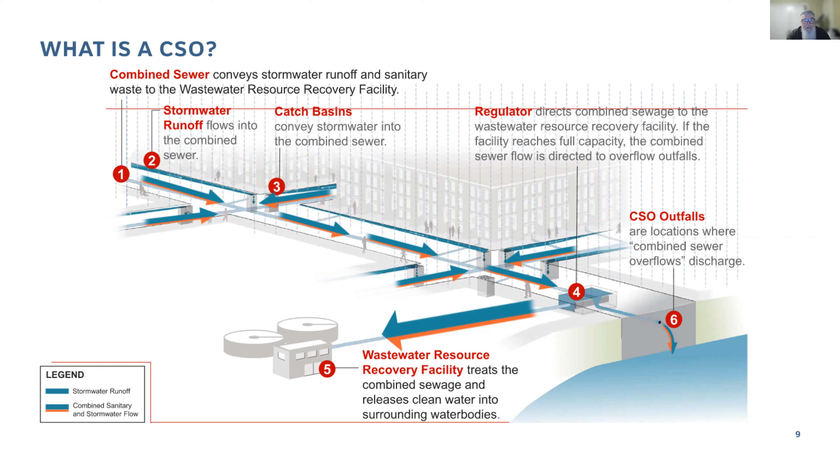So what is a CSO? New York City's sewer system is approximately 60% combined, which means it's used to convey both sanitary flow—from your toilet or shower, for example—and also storm flows from the street when there's rain or snow melt. When the sewer system is at full capacity, a diluted mixture of rainwater and sewage can be discharged into the local waterway. In this case, that's Gowanus Canal, and that is what is called a combined sewer overflow. CSO retention facilities, like the one we intend to construct here at the Owl's Head CSO tank site, collect and store that combined sewer overflow during a wet weather event until it can be pumped back to the wastewater treatment plant.

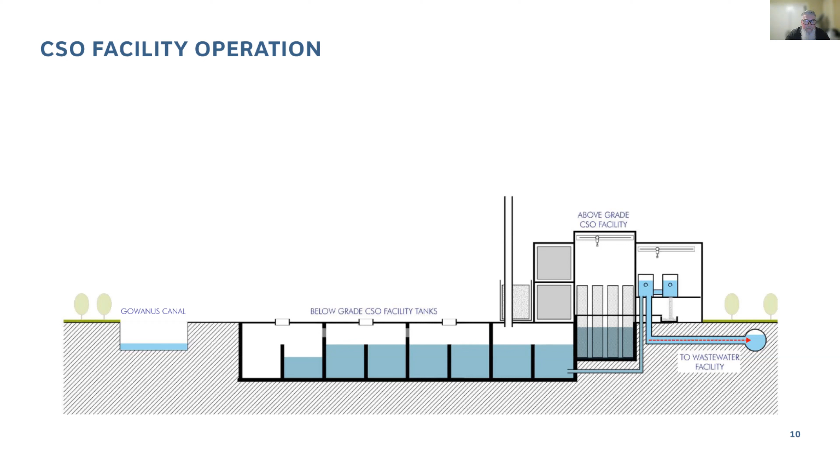The major components of a CSO facility can be seen here in this profile view. Most of the tank is below ground, so there are large holding cells below ground. Then there's an above-ground head house, which contains all the electro-mechanical equipment like screens and pumps, and control equipment. We will also have odor control and screens. Next slide, please.

Next slide, please. Just want to quickly review what's there today. Those of you who are familiar know it's been home to the Department of Sanitation's salt lot for a couple of years now. In addition, Big Reuse operates a composting operation for DSNY there. And the Gowanus Canal Conservancy was previously on site doing some ecological stewardship and programming. Then just south of 5th Street, there are a number of manufacturing and industrial businesses there.

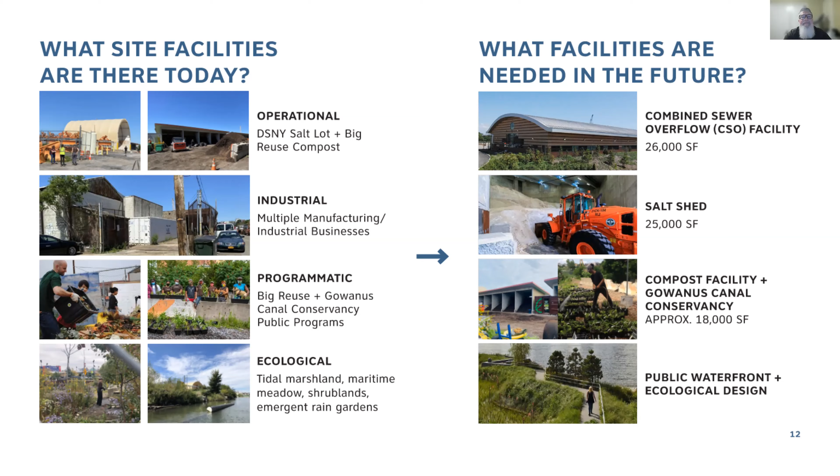Just quickly to talk a little bit about the project design phasing. We submitted the salt lot facility design to EPA back in May 2022, and the final design was approved by PDC back in August. We are completing the design for the CSO facility. There are actually 2 phases to that, CP2 and CP3, but they need to be submitted to EPA for review in August of next year. Then the last piece is design of the public realm and the Big Reuse facility, and that design will follow the CSO facility review by EPA.

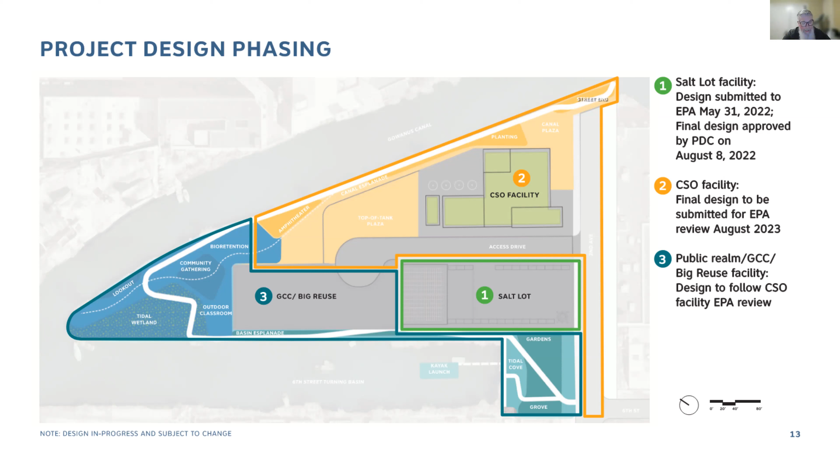This is the third in a series of public engagement meetings, and the feedback has been critical as the design takes shape. The next scheduled engagement meeting will be in early 2023 to share the design developments and continue this conversation. We plan to begin construction on the first construction package, CP1, in roughly spring of 2023.

As that's moving along, we will have a dedicated community liaison on hand to be the direct contact for the community. I also wanted to mention, you may have noticed there is some ongoing construction out there right now.

That construction is for a new bulkhead along the north side of that site. The bulkhead construction will be wrapping up around March or April of next year, right in time for the first phase of the CSO tank construction to begin.

And then construction is scheduled to be complete before 2030. So with that, I'm going to hand it over to Kevin Keating from Selldorf Architects to walk through the architectural design for the facility.

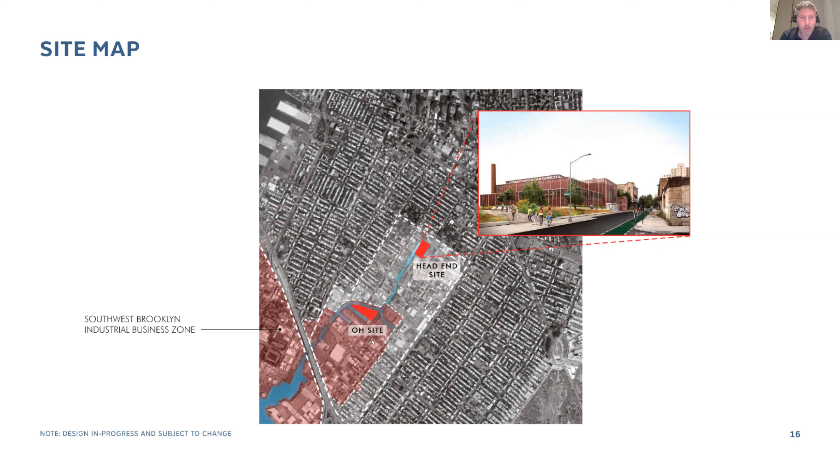Our site is located down where my cursor is, at the bend of the canal. We are in the Southwest Brooklyn Industrial Business Zone. Let's slightly reorient the plan here and zoom in a bit. As I mentioned, we're at the bend of the canal. It's a peninsula, surrounded by 1,700 linear feet of waterfront. It's a 5-acre site. A couple of key things to note here.

Again, we're in the Southwest Brooklyn Industrial Business Zone. This zone was created to incorporate zoning and manufacturing and keep them within the confines of the city, and to further help propel their growth. We're at the northern end of this IBZ zone. As many of you may be familiar with, this zone can be viewed from the F train viaduct, which crosses south of our site as you come out of the Carroll Street station and make your way back into 7th Avenue.

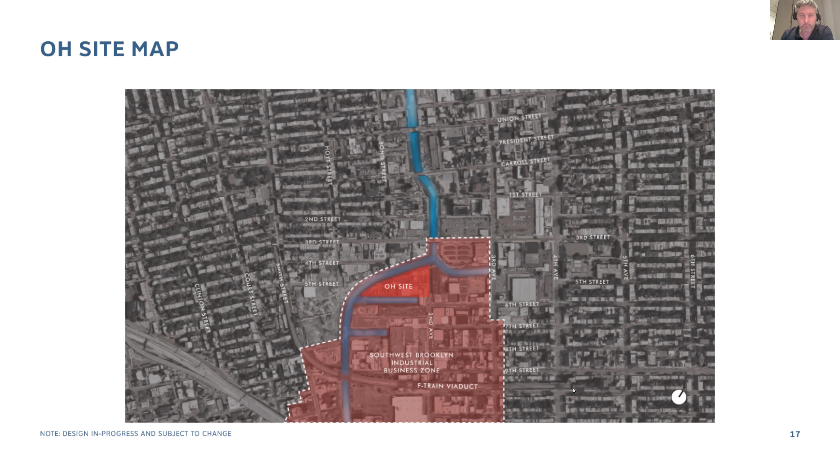This next slide here is actually from the Smith and 9th Street station. It's the highest elevated station in all of New York City, with a great vantage view of the site from this particular location. You could see here we've highlighted our site, the OH site, and the overall makeup of the IBZ zone. There's a pretty monochromatic palette to it, very industrious, low-lying buildings.

The next image here is also from the F train viaduct. The G train also goes along this route. This is of the OH site. In the foreground is the tip of the peninsula. Where my cursor is, this is the 6th Street turning basin, and the canal follows my cursor as it makes its way towards the Whole Foods Esplanade, then makes its way north.

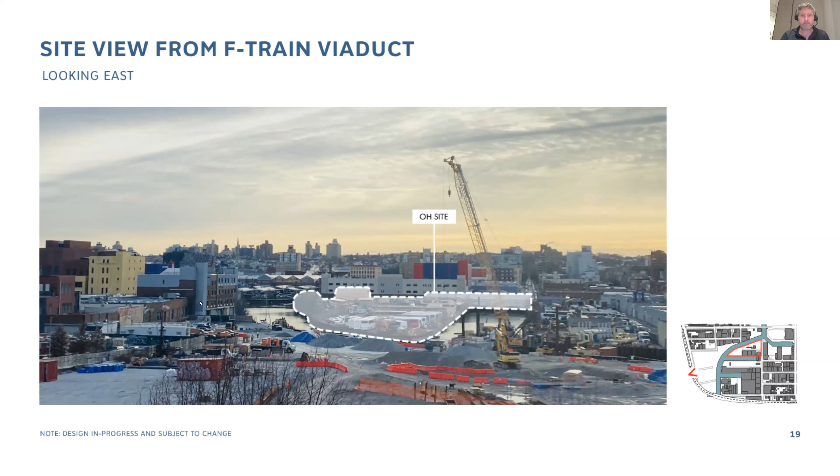This is a view from the Esplanade that I just mentioned. On page left is the OH site as it currently is, with the existing salt shed that was mentioned. In the background, looking west, you could actually see the F train viaduct, and to page left, there is the Smith Street station.

Okay, so I just want to walk you through what is currently on site. 2nd Avenue is located where my cursor is. To the page right, there's a new DOC facility. Not really new, but it's there. There's also a key point here we want to mention.

There's a DOT parking facility, which we have to maintain accessibility to. Moving across the page, there's an existing DEP pump station, which is below grade currently. We are looking to incorporate that into the new facility once it's built. There's the DSNY salt shed and salt lot.

This is part of the phase 1 approach that we are taking to move that facility south, south of 5th Street. Adjacent to that is Big Reuse Composting and their operations. They're in partnership with the Gowanus Canal Conservancy. 5th Street bisects the site. As part of this project, 5th Street will be demapped and turned into an access drive.

Just where my cursor is, the 6th Street turning basin. Adjacent to that is a series of industrial and manufacturing buildings and businesses that DEP is working with to relocate. At the tip of the peninsula is the parking facility for buses. All along both the parking facility and all along 6th Street is currently inaccessible to the public. We are certainly hoping to change that.

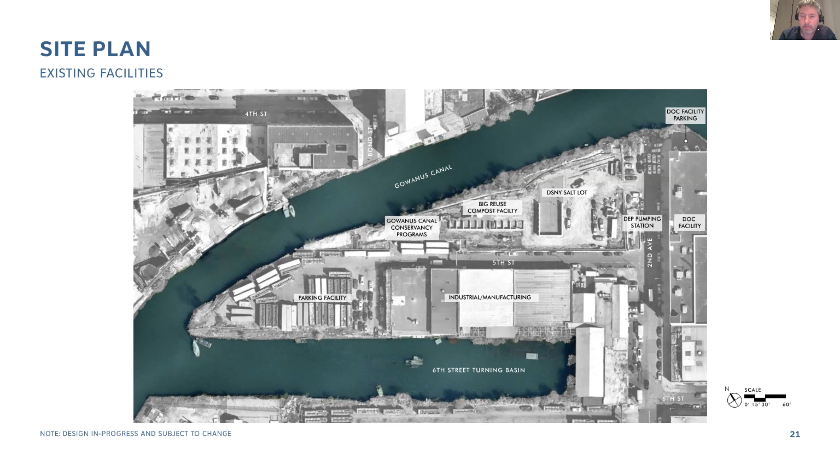So this is just a really simple diagram of the major infrastructural components that we have to build here. It starts with the CSO facility. This will be located at the northern end of the site above the access drive, which is formerly 5th Street. The salt lot will be built just south of that. It's already moving forward and received approval from the city.

And to the left, we are working with all the stakeholders involved, but we will be positioning the composting facility along with program space for the Gowanus Canal Conservancy.

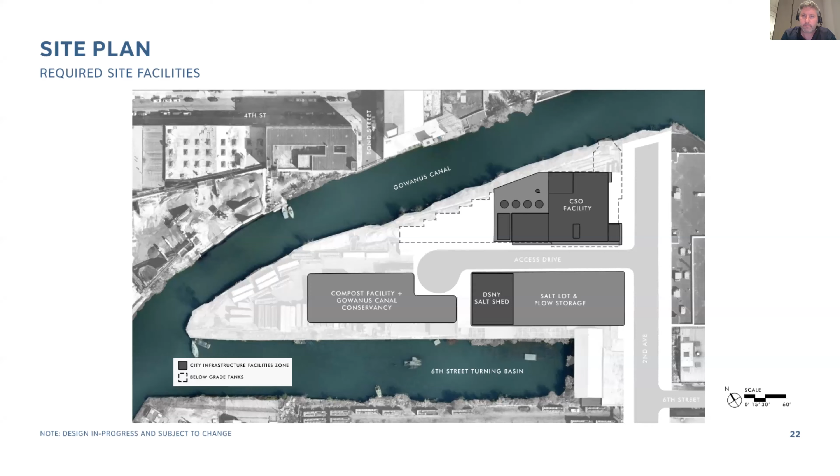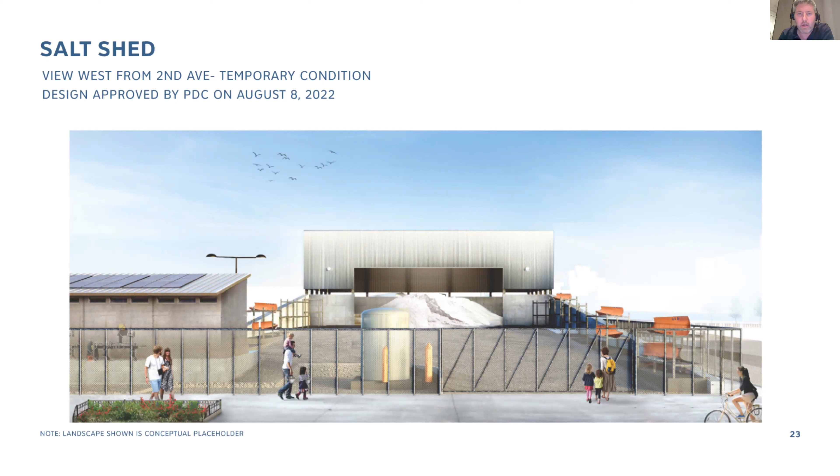Now, we're here to talk about the CSO facility for the Salt Lot site and our conceptual approach to its design.

So we'll just start below grade. As we all know, this is an extremely large storage tank. We need to position the building adjacent to 2nd Avenue. That's where the CSO line is currently. And it currently discharges into the Gowanus Canal at the outfall point, which we're looking to cap and seal. Instead, we're looking to divert that water into the facility.

The positioning of these tanks obviously has ramifications above grade, but you could see that the tank would come into this zone here, if you could see my cursor, and that's where the screening aspect of this project would take place. And then it would subsequently fill up these parallel tanks.

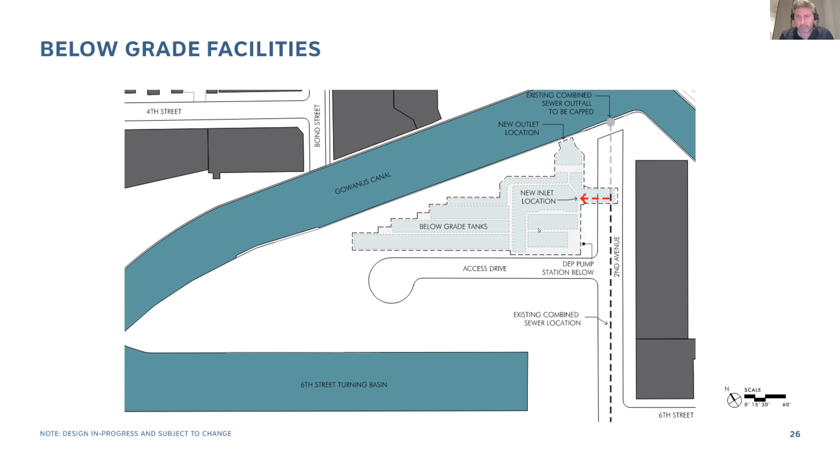There's a quick diagram just to note the elevational differences and levels that we are trying to achieve. We're raising this entire facility and all its critical equipment above the design flood elevation—not only the 100-year flood elevation, but even higher than that. So plus 14 feet will be the elevation that we're targeting. The current elevation at 2nd Avenue and what was 5th Street, the access alley, is plus 7 feet. So there's a difference there, which we have to mitigate.

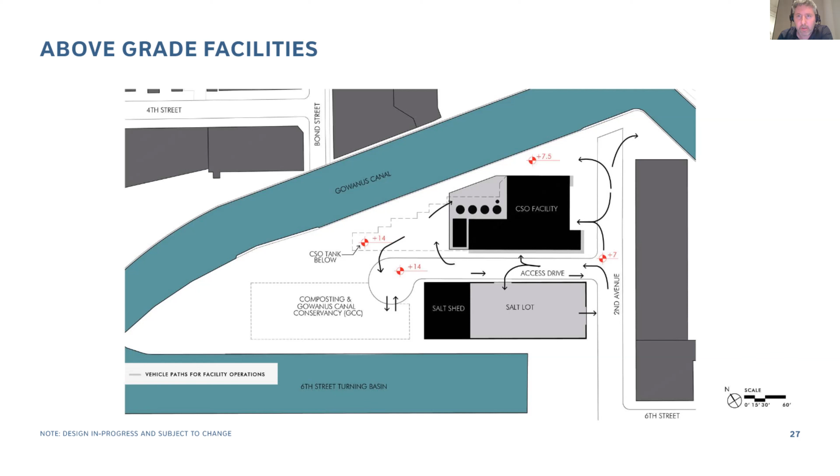A couple of these arrows here are just indicative of vehicular traffic. Now, please note that most of this vehicular traffic will be just seasonal or sporadic at times, and really not as frequent as it might come across.

Okay, so let me just quickly walk you into the building. Let us keep in mind that this is a machine, and it's an unmanned facility. It really is just one gigantic machine here to store water and to filter that water accordingly. Some key components that you'll see here.

This is the CSO pipe in 2nd Avenue. Water during a heavy rainstorm will pass through what we call the main screening room. That's the largest volume in the project. This vertical element where my cursor is—that's a series of vertical screens that is literally pulling any debris that might have infiltrated into our water system before it is then put down into the tanks.

In that space, where my cursor is here at a mezzanine level, in that also large space, are the degritters. They're there to remove any sludge that may be in the water itself before the water is then discharged back into the system and down to the Owls Head water treatment facility. As part of this project, we have to filter and purify any air that is within the building.

We have large fans located at the 2nd floor level. These fans pull air from the facility and pump it into odor control vessels, which are massive carbon filters that purify and scrub the air before anything is let out into the stack.

A couple of key things: there will be access requirements over the top of the tank where maintenance will be needed to access the tank below grade, and we'll do our best to mediate those needs. But one key element to remember is that there's an aggressive service condition in this environment - it's extremely corrosive in many ways, and we need to be as durable as possible when specifying material.

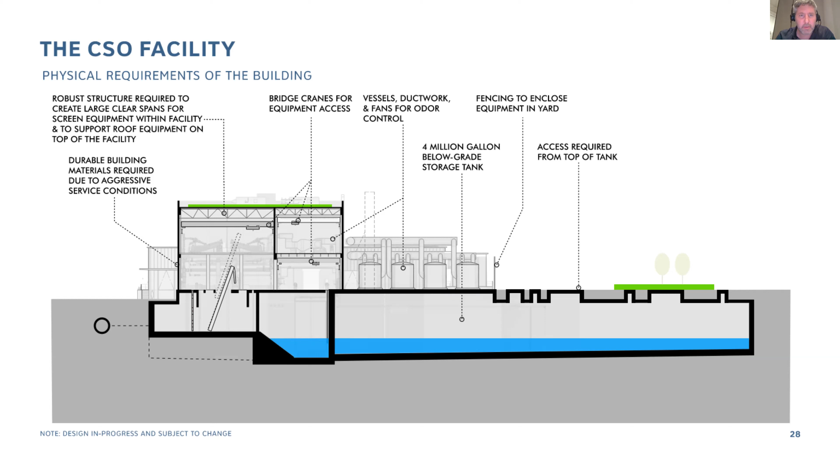So we are working heavily with the engineering group. There's a large group of great engineers working with us to achieve Envision Gold, our sustainability goals for the project. Obviously it starts with remediating the brownfield that we are in.

In addition to that, we are stopping 4 million gallons of sewage from entering our waterways. On top of that, we are doing our best to set up bioretention zones to manage any site runoff in and around the site. As I mentioned before, all sensitive equipment will be raised further than the 100-year floodplain.

We will, with our engineers, be providing high efficiency equipment. This energy conservation measure will reduce the operational energy by 50%. And in further response to feedback from the community on providing green roofs and mitigating any heat island effect, we are introducing that to all levels of the project, both at the secondary volumes and the primary volumes.

And lastly, all material will be sustainably procured. We'll try to use as much recycled content in the material as possible.

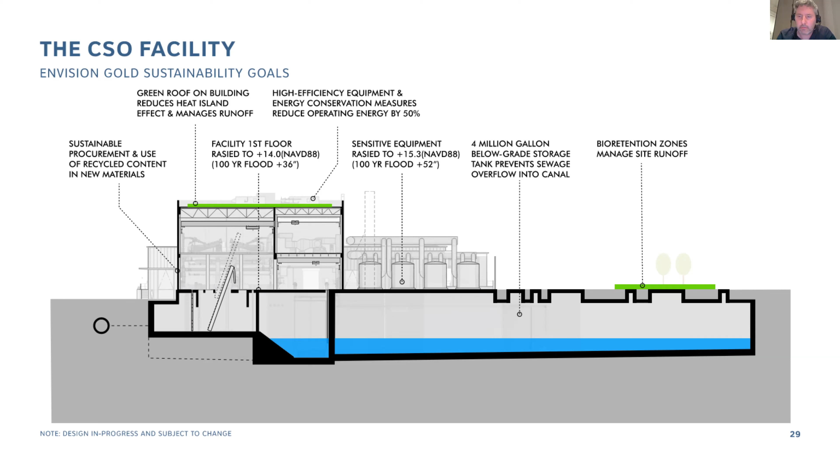So this is a quick plan of the facility. As I mentioned, this is the inlet - you can see where my cursor is into the facility. This main room here is the screening room, where all the water that enters the facility passes through. All the physical debris is removed and transferred into a dumpster located where my cursor is.

This is double height space in many cases where we have bridge cranes used to access and maintain this equipment. The secondary volumes house all the equipment - the electrical equipment, instrumentation, and pump station equipment needed to facilitate this process.

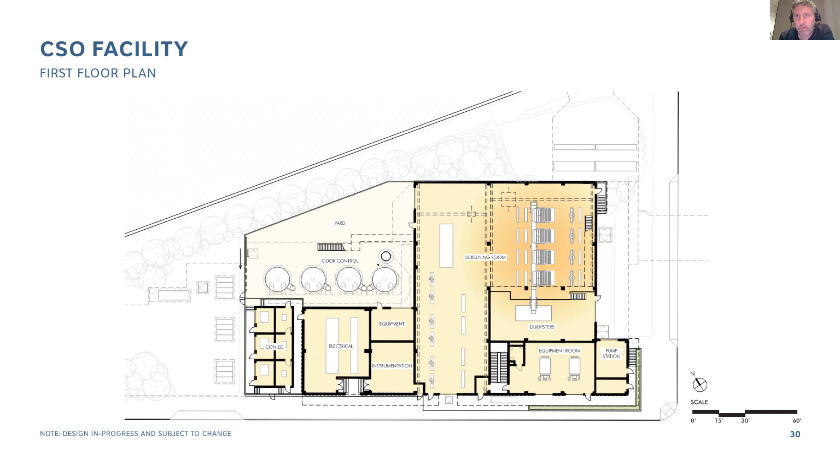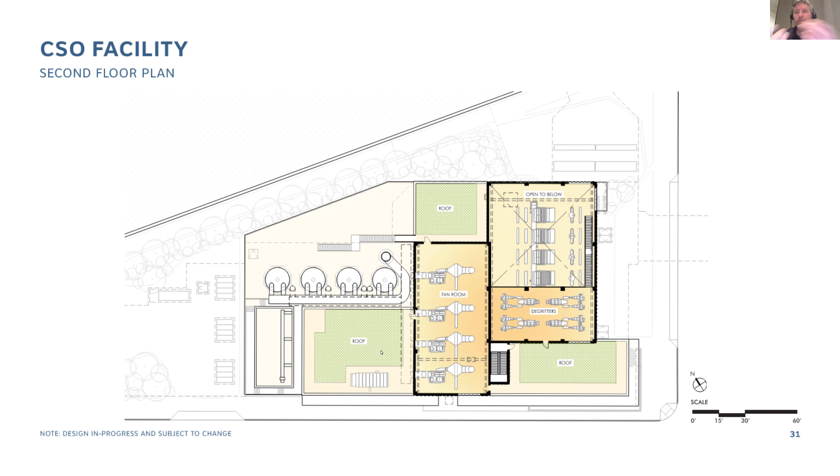Tertiary areas will be the yard, and in that yard we have the odor control vessels, which we'll show you shortly. The second floor here is that primary volume that raises up. The secondary volumes, as you can see here, we're trying to cover with as much green roof as possible.

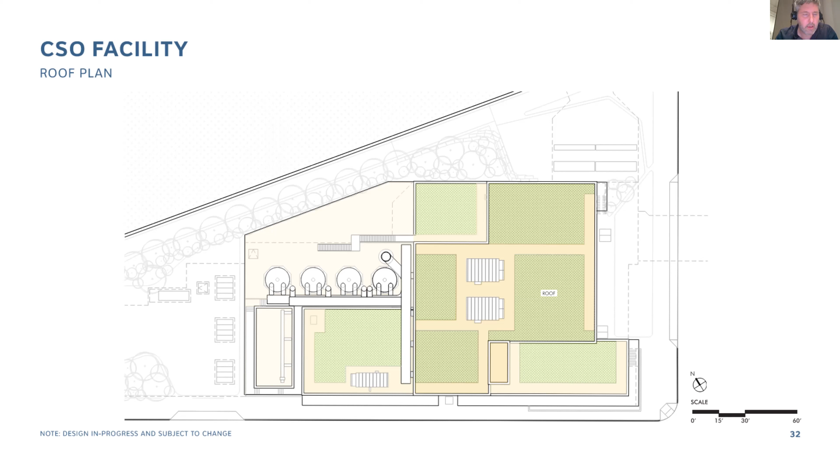And this is a view of the facility from above, looking down. We are trying to provide as much green roof as possible to mitigate the heat island effect and manage water as best we can.

I just want to walk you through some of this that has really helped inspire us, based on your feedback about making this building as industrious and true to its form and true to its industrial nature as possible.

As many of you know, there were many of these sort of facilities up and down the Gowanus Canal over the decades.

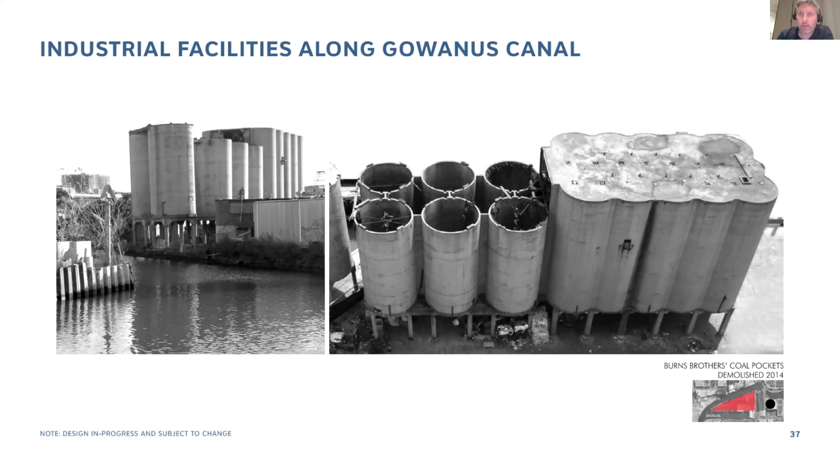And you all know the Burns Brothers' coal pockets. This building is no longer existing. You can see this beauty in the sort of industrial sculpture of the building, this beautiful ripple effect created by this industrious form. You get that sense of what the canal really has and what it's really about - again, that striking balance between nature and industry.

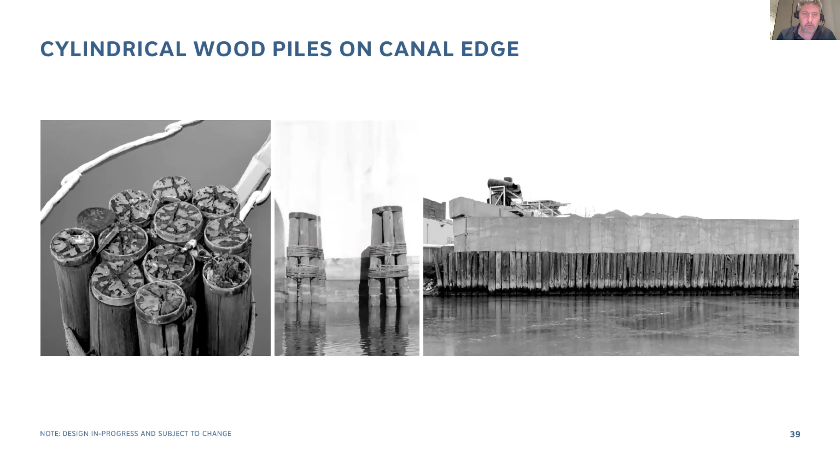It's with these forms and with that imagery that I showed you that we have positioned ourselves to look at this and try to figure out how we pull this essence into the building.

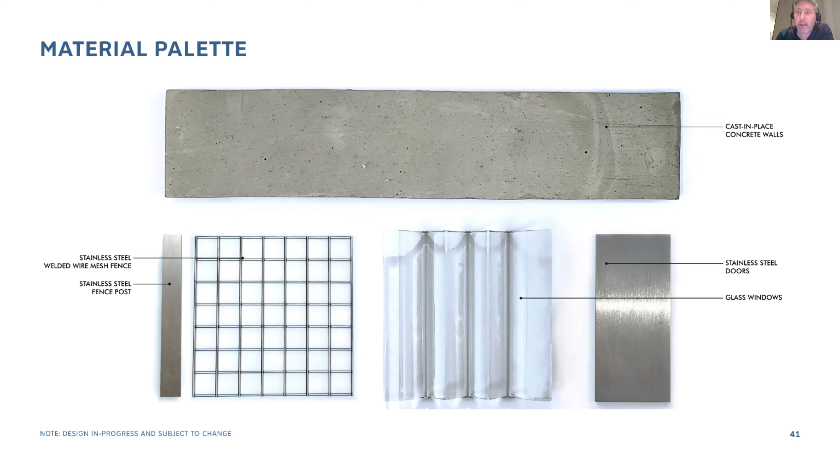So this is just a quick snapshot of the refined yet simple array of materials we're planning for the building. It will be cast in place concrete, formed in the exterior as noted. There'll be stainless steel for any of the entry points into the building - again, very corrosion resistant. In addition, this main glass element will be curved, fluted glass that takes on the same formwork and vernacular as the building skin. We've done a full-scale mock-up of that formwork and shape we're trying to achieve on the building facade.

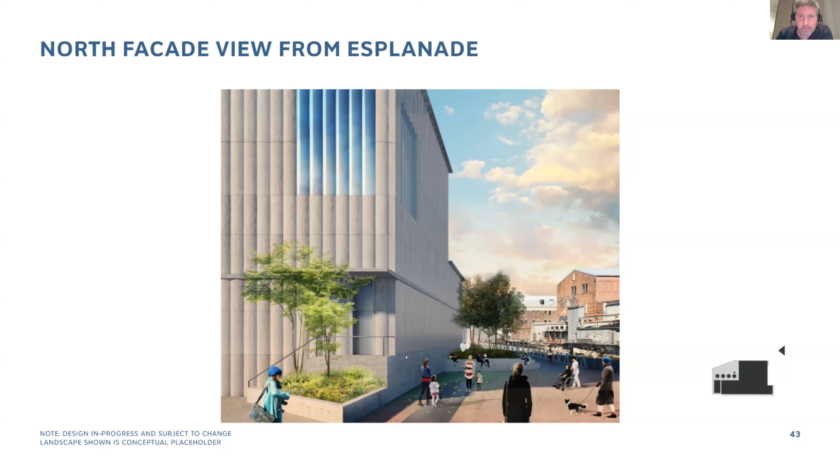Now let me quickly walk you around the building. This is a view on the north side of the building - we were at the northeast corner there. You can see the large aperture of curved glass that we will be inserting into the primary screening room, and you can see the tubular formwork and how it caters to the reflectivity and industrial vernacular that we were just talking about.

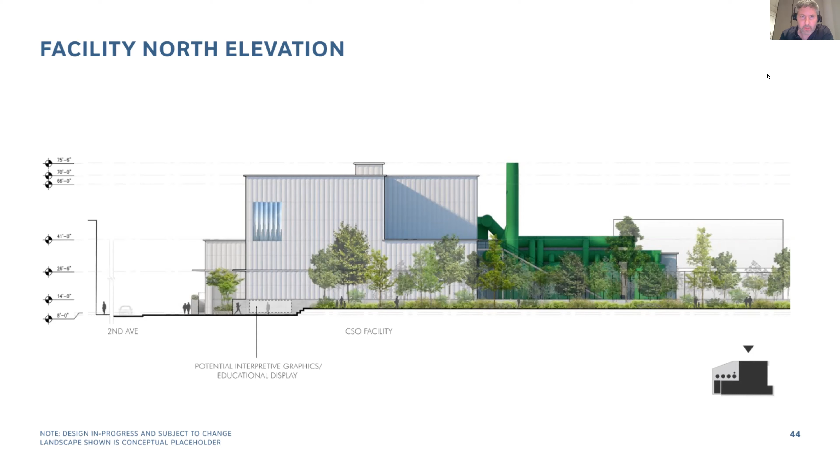You can see here the fluting and concave formwork that creates the facade. The large apertures lead into the main primary spaces. So you get an aperture here in the primary screening room, a second aperture into the degritter area, and a third aperture at this location into the fan room.

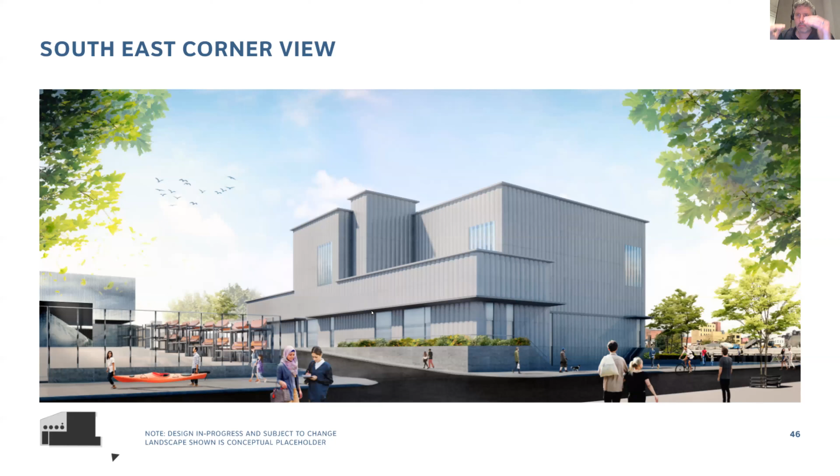In order to balance out the verticality of the building, we've introduced these heavy cornice lines along with the canopy at this lower level. This creates a little dialogue between verticality and horizontality.

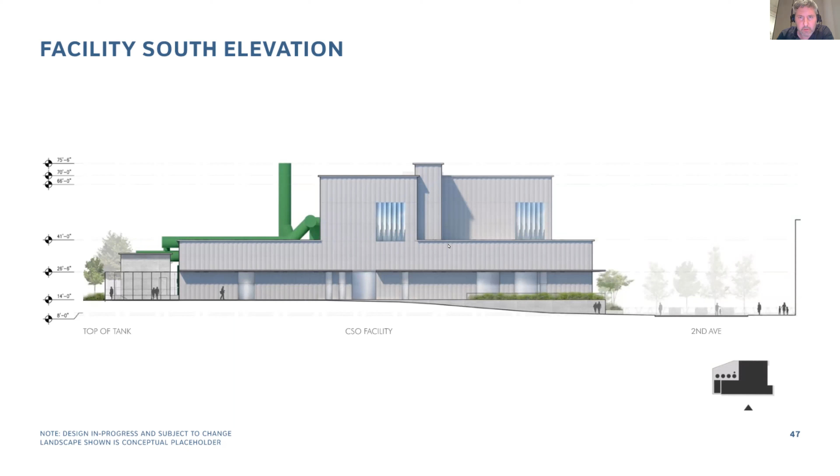This is a view of the building from the access alley. You can see these large vertical apertures that will be beautiful in their reflectivity.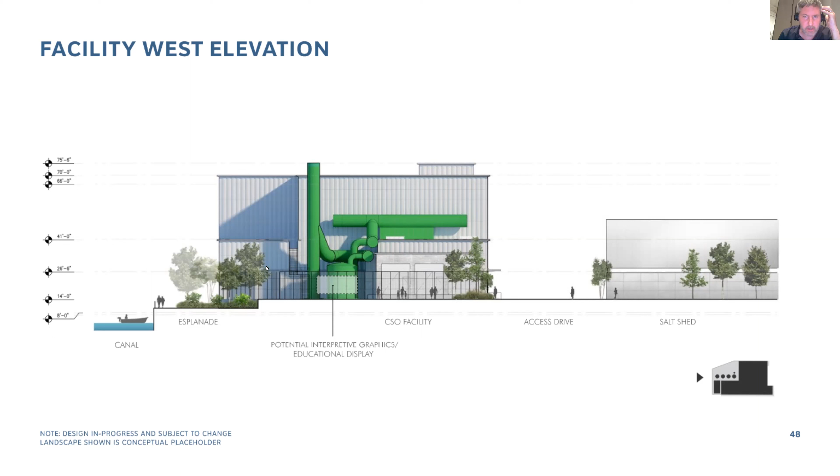The last elevation is a view of the west side of the facility. You can see the odor control vessels as they are positioned, and the volumes of the secondary volumes in the foreground and the primary volumes in the background.

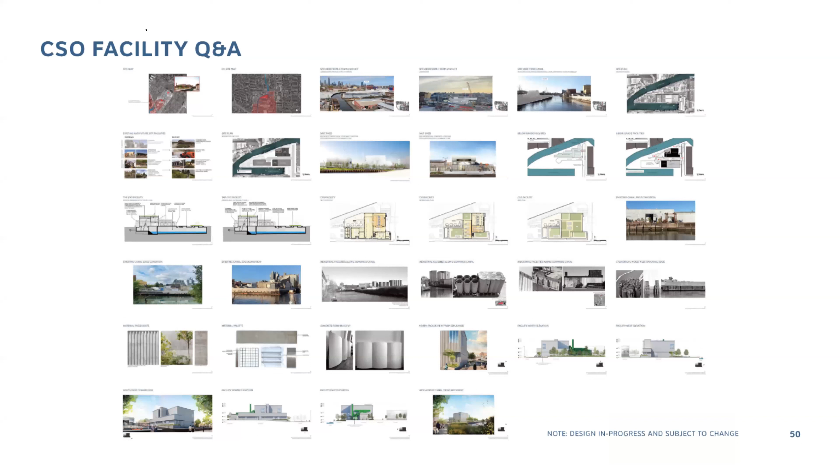Yeah, I could speak to that. I mentioned the 100-year floodplain, and I mentioned... sorry, Kevin Keating. We have two Kevins. Kevin Clark, do you want to speak to the general question, and then maybe Kevin Keating can speak to the architectural design?

Absolutely. So Kevin Keating had talked about the design flood elevation. That just means the elevation at which the critical components of the facility are located, so that if there was an extreme flood, that equipment wouldn't be damaged. It's literally things like locating electrical equipment above that elevation. As far as performance is concerned, CSO facilities like these aren't necessarily designed to treat and store CSO volumes produced during a very extreme wet weather event, like a 100-year, 1,000-year, or 10,000-year storm. They're simply not designed for that.

However, the CSO facility should still function as long as there's still power there. We also provide the ability to bypass the facility, which means combined sewage produced during that wet weather event would bypass the facility and discharge directly to Gowanus Canal to relieve the sewer system. I'm not sure if that completely answers your question. It should - I guess the point is it would not contribute to flooding. It wouldn't make the flooding condition any worse; in fact, the hydraulics should make it a little bit better. But in a very extreme event, there's not a lot that the CSO facility is going to help with.

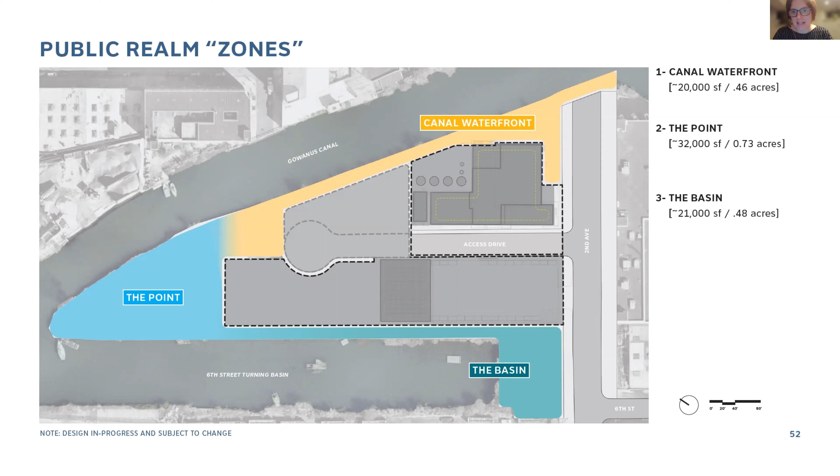If you've attended our meetings before, you've seen this diagram, but it sounds like from our poll, about 30% of people here are attending for the first time tonight. So I'm just sharing a little bit of that context.

We've been extremely appreciative of many of you and your fellow community members and stakeholders coming out to share community input on the design process. When we first came to you at our first meeting in February, we had approximately 140 attendees. You can see the diagram we presented on the left, simply showing the area that was public realm, and getting a lot of different ideas about the quality and the character. Glenn, I'm really glad you brought up the comment around the naturalized bulkhead, because we've tried to find opportunities for that within this project that align with the infrastructure and industrial needs of the site.

In our second community meeting in May, we had about 45 attendees, and we dug into different programmatic concepts more, and learned specifics about how certain spaces might feel, and what other programs could happen here that we weren't considering. We're trying very hard now to work with the agency stakeholders to incorporate more of those ideas into the design.

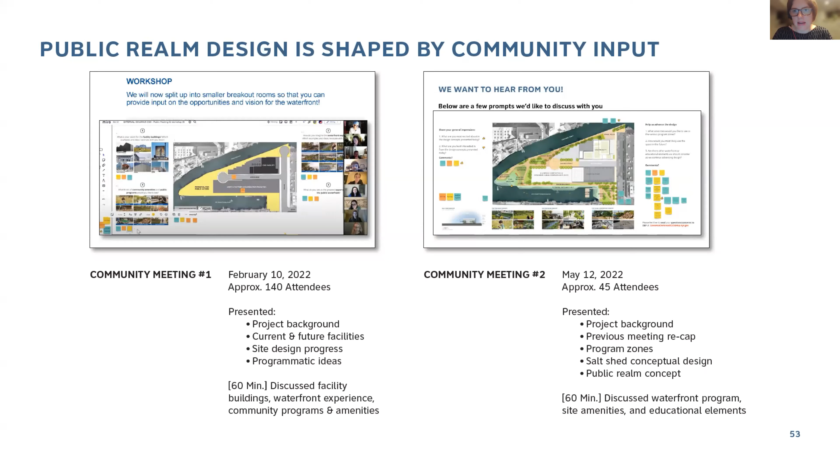At our first public meeting—I'm not going to read all of the points here, but happy to return to this slide during the discussion if there are specific questions. Kevin nicely shared some of the updates on the building that respond to community feedback. But from the perspective of the waterfront, we definitely heard loud and clear a desire for an ecologically responsive and natural shoreline where possible, one that can support different wildlife habitats as well as a variety of edge conditions, the importance of water access, and the importance of improved circulation across the site, meeting many different levels of accessibility and being fully accessible to all users.

We also heard a need for different community programs and amenities, specifically outdoor education, gathering, and performance, as well as opportunities to integrate more creative practices.

This drove the development of our different goals for the project. A primary goal of the project, obviously, is to provide site safety in a mixed use infrastructure area. We can't forget that while this is public space, this is also, as Kevin called it, an active machine.

We do want to improve site resilience and really work with some of those future flooding constraints, both protecting certain areas from higher level floods but also being resilient to floods when they do happen. We want to provide public access to and along the waterfront, support ecological functions and environmental stewardship, and celebrate the neighborhood's cultural and historic character.

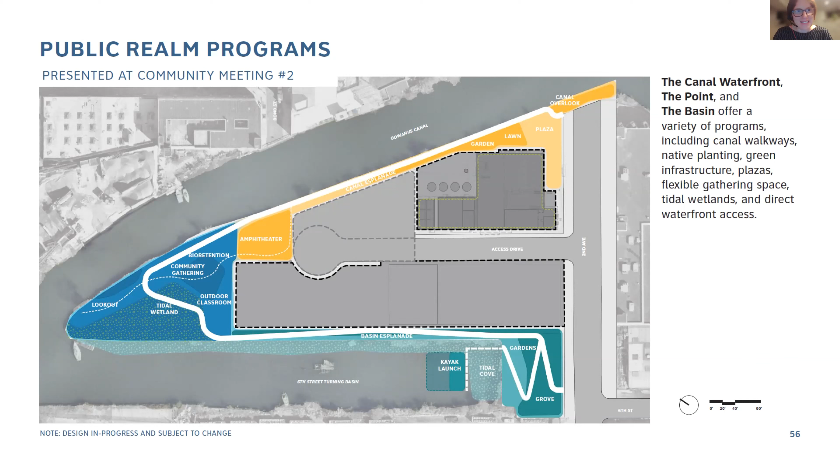So in our next meeting, I think we'll have more updates there, but as many of you know, stakeholder and agency coordination takes a little while, so it's still in progress.

This was the more adapted plan that was also shown at the second community meeting, highlighting many of those same features. It included various ecological habitats and meaningful places to engage in education, stewardship, and community, while also balancing the important needs of the CSO facility.

So just to call out a couple of them: the Canal Plaza at the north side of the intersection of 2nd Avenue, potentially a gathering space and educational space open to the public, a walkway that wraps around the perimeter, performance space, bioretention space that Kevin noted earlier, gathering space, outdoor classroom, tidal wetland space, and kayak launch and/or boat access at the intersection of 2nd Avenue and 6th Street.

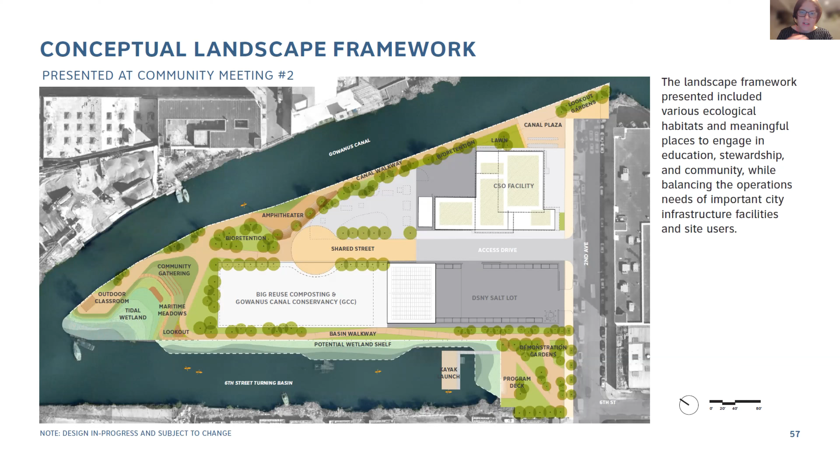We heard a ton of great feedback, so we've made this diagram to represent some of that feedback. I'm not going to get into all of it this evening, but there was definitely an expressed need for gathering spaces with different scales and views of the canal, a desire for green infrastructure and sustainable practices, and site safety.

Access to the water was a major priority, not just at 6th Street but other locations around the site, and also the importance of coordination with the dredgers and the GCC. So we've really taken this to heart.

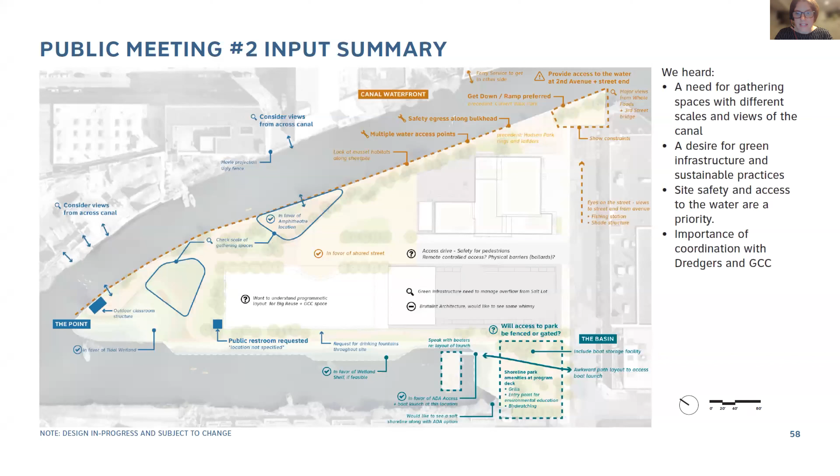We have been meeting with many agencies that actually regulate and, in some ways, control what happens in these intersection moments, and stakeholders, as well as community groups, including the dredgers and the GCC. So we met with the Gowanus Canal Conservancy to understand their program and layout needs.

We've met with the Parks Department multiple times, as you can see in this list, sharing some of the initial ideas we had, but also some of the community concepts that had come forward, reviewing them particularly with an eye towards accessibility. We've met with the Parks Department Waterfront Division.

We had a great conversation with the dredgers around water access preferences at that 6th Street turning basin. We've also met with Big Reuse and, as Kevin noted, met with the Public Design Commission, and are continuing to coordinate with the Department of Sanitation.

So there are many partners overlapping within this space. A very important one has also been thinking about how it's complying with some of the EPA regulations and bulkhead conditions. Much of that is still in progress, and we look forward in our next meeting to share more of those agency updates with you.

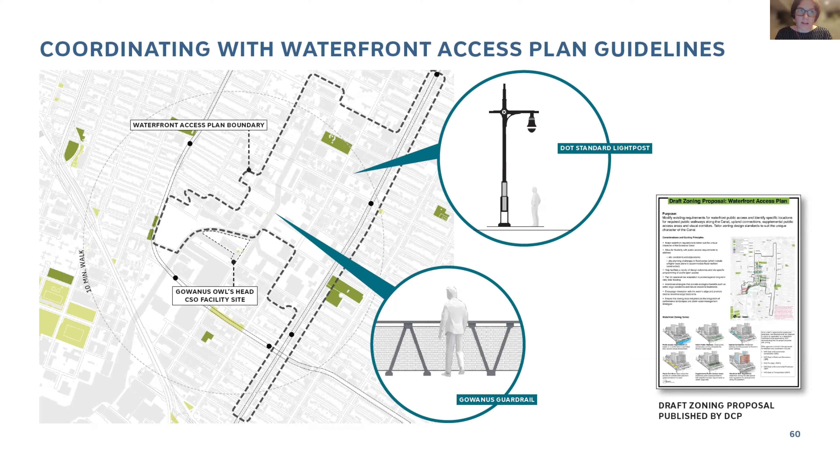Just a reminder, while the site lies outside of the waterfront zoning, there's a desire for the landscape to feel connected and part of the greater public realm that will be emerging along the Gowanus over time. So we are using some of the standards that have been put forward within the Gowanus rezoning waterfront access plan for this site, so we feel continuous and part of that greater public realm language.

And I think with that, I'll pass it to Anna to talk about the progress so far, focusing on the area and immediate environs around the CSO facility.

Thanks, Gina. I'm Anna Hochhalter, a landscape architect with SCAPE. As Gina mentioned, I'll be talking through the public realm design updates, and we'll end with an interactive poll with a number of questions that we'll use to help us continue progressing the design.

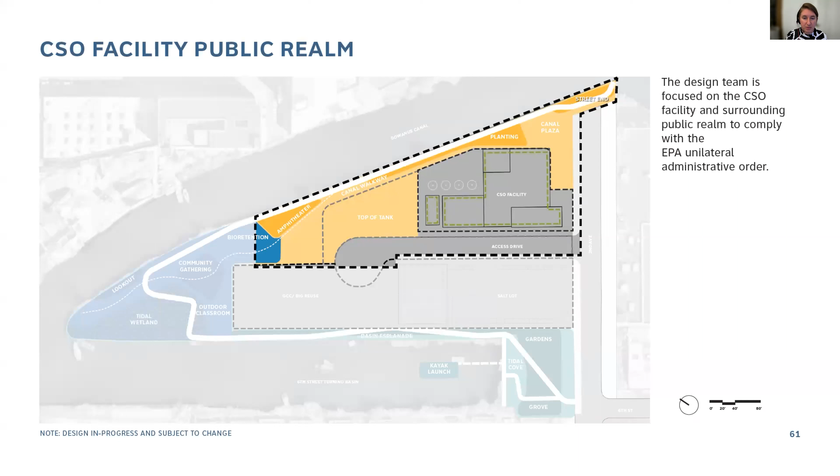The project is a complex one with multiple design phasing schedules, which allows it to follow the EPA deadline schedule. Our design focus today is on the public realm adjacent to the CSO facility, roughly shown in this image. We're working holistically across the whole site to design the public waterfront, and we'll share an updated design on those areas in a future meeting.

The area surrounding the CSO facility has many operational needs. The team has worked closely to design a meaningful public waterfront in a way that does not hinder the important operations and maintenance at these facilities. This means we cannot have any fixed elements within the maintenance vehicle pathways needed to operate these facilities. You can see where those movements need to occur on top of the Canal Plaza and the top of tank.

The public realm seeks to reintroduce some of the natural hydrologic functions and ecological performance of the site's former tidal marsh, while also celebrating the neighborhood's unique qualities and bringing the community to the water.

Looking at these in-progress concepts on screen, the primary pedestrian access to the waterfront begins at the end of 2nd Avenue at what we call the Canal Plaza. Now I'm going to walk us through the plan so we're all on the same page about the programming in these different zones.

Starting at the Canal Plaza at the end of 2nd Avenue, this is an open, flexible space that has integrated seating along the edges with lush marsh planting and maritime planting at the face of the CSO facility. This is next to the 2nd Avenue street end.

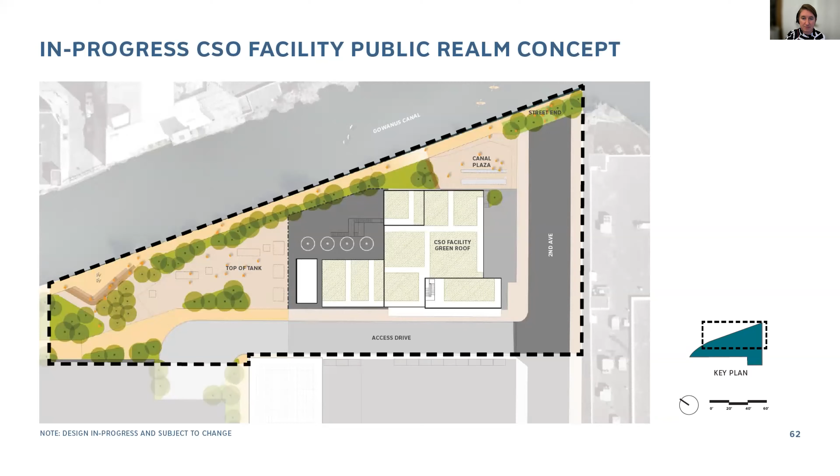Next we have a series of illustrations showing how these programs are coming together in our in-progress design. We're cognizant of our site's position along the Gowanus Canal and are designing with that context in mind. As Gina mentioned, we're using the Gowanus guardrail as well as the light pole.

The Gowanus guardrail helps signal that this is a public waterfront in the spirit of the Waterfront Access Plan guidelines. You can see some of the elevation changes between the top of the tank and the canal walkway that Kevin mentioned, and we're incorporating those grade changes into design elements such as the amphitheater.

We're designing various green infrastructure systems such as bioretention and pervious paving, seeking to improve biodiversity with a native maritime planting palette. This area along the walkway is fairly constrained. We heard from previous meetings a desire for more meandering pathways, and there is an opportunity for that type of experience in other locations, such as the point, which we'll share at a future time. But this area is quite constrained with all of the infrastructure needed for the CSO facility.

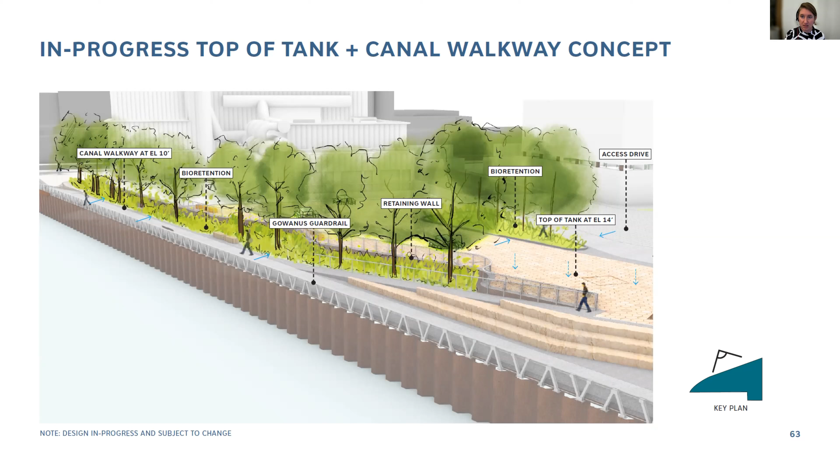So I'll talk through the canal walkway concept. These are all in-progress concepts, but here we're celebrating the Gowanus industrial character with details such as cobblestone banding, cool toned pavement, and the boldness of the Gowanus guardrail in context with a rich planting palette.

The views from this location are tiered, first from the walkway along the canal edge, but also from the top of the tank, where you'll be able to view across the canal under canopy trees and lower shrub layers. The design will use hardy, salt-tolerant plants with an educational quality that aligns with the goal to make the stormwater management visible and celebrated on site.

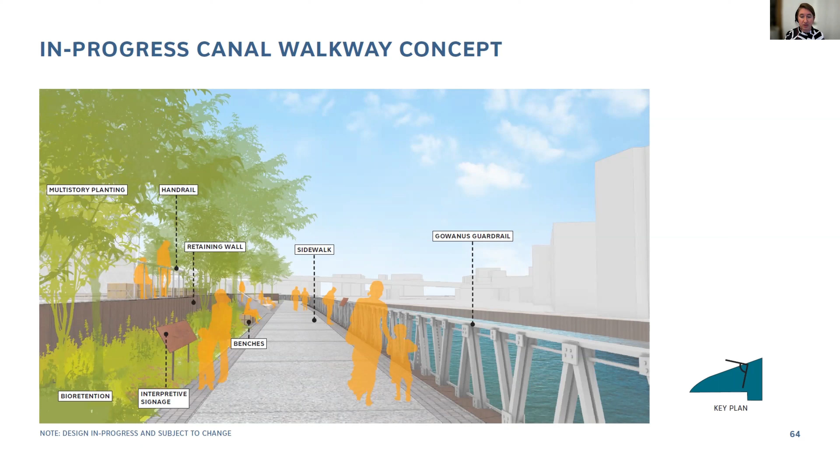The walkway concept has areas for seating and potentially for interpretive signage. We heard from previous meetings that interpretive elements are important, and so this is a potential area where those elements could be incorporated.

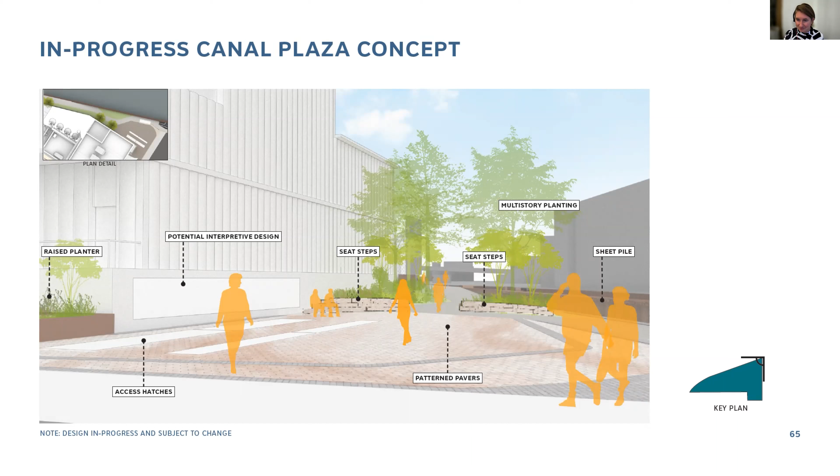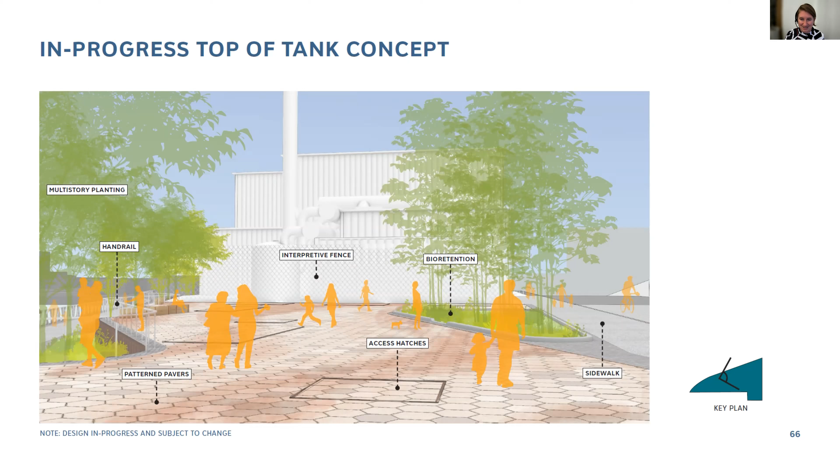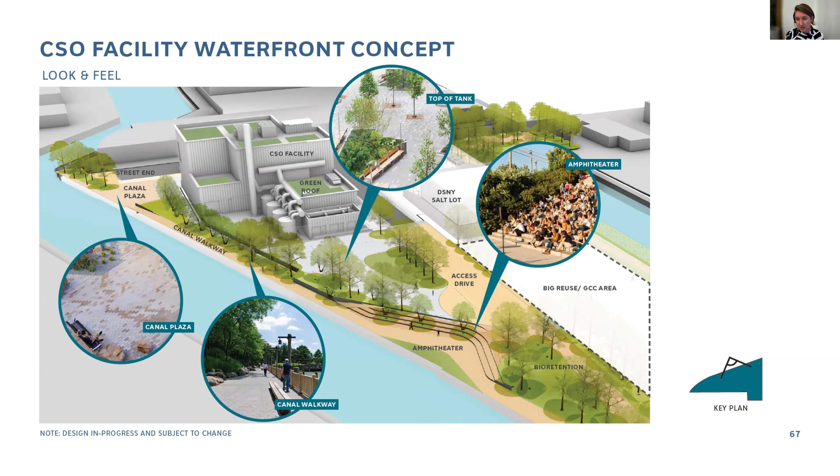In our next portion of the meeting, we're going to focus more on the look and feel of the public realm, and we really want to hear from you about the materiality and what really inspires you about Gowanus. So we're digging deeper into the design detail development. For example, we're developing a planting design and palette, and we've heard a community desire to prioritize native ecosystems.

We translated that input into four planting design goals: to reconnect with the historic ecosystem, to enhance the wildness of Gowanus, to restore native habitat, and to reflect the Gowanus character.

For the look and feel of the design features, getting into the paving, the materiality of the walls, and various steps and detailing, we are seeking to reflect the urban Gowanus character. This is something that we heard from previous meetings. Some of the things that inspire us about the Gowanus character are the adjacent industrial uses, the steel bulkheads, concrete blocks, interwoven stone vegetation, brightly colored metal containers, bold supergraphics, naturalized shorelines, and of course pop-up programming.

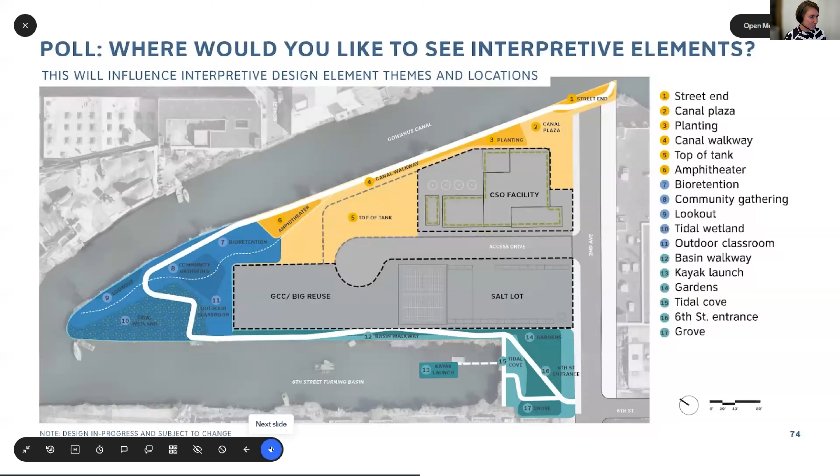I think with the amount of ideas that we just saw flash on our screen, we can't concentrate it and wouldn't want to concentrate it all in one spot. So let us know, you can use the numbers or the words.

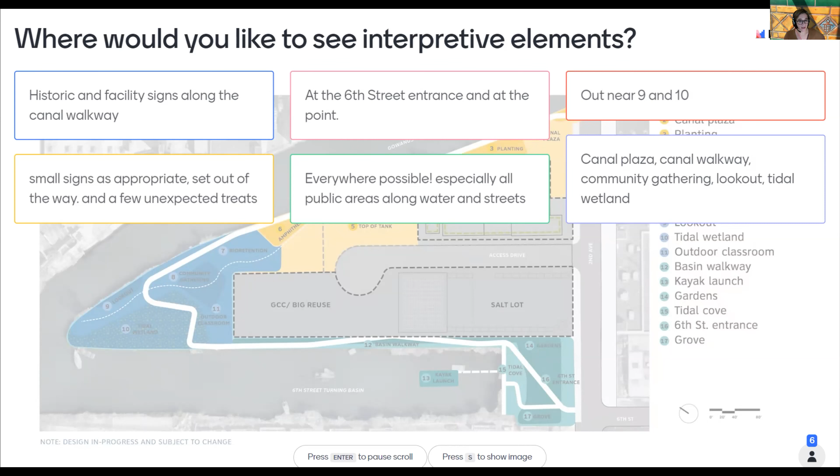Okay. This is so helpful. Anna, is that the last poll? That's a good long answer there. And Rita just put something in the chat too.

Yeah, it's nice to see the comments around the type of signage that makes sense in different places. Maybe some more immersive landscapes aren't overly interpretive. That's a very interesting idea.

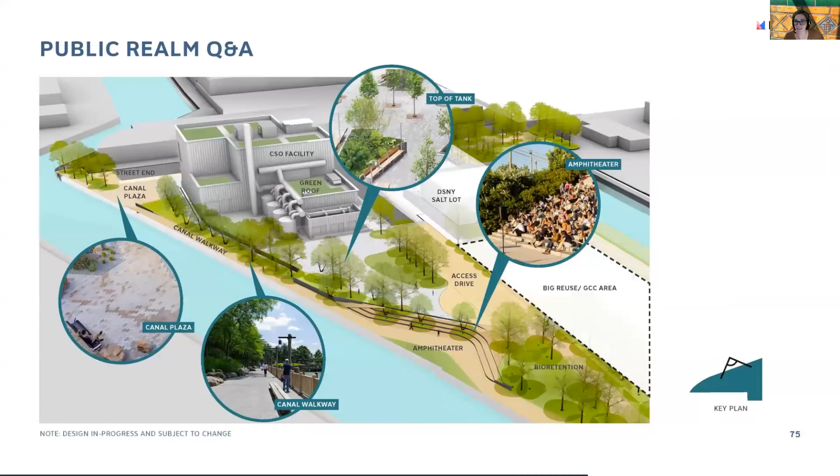Sure, there was some mention of the Second Street access. It sounds like that's being kicked down the road. Can you talk any more about limits to that? I mean, we did ask for the possibility for the public to put a boat in there, which has been the case for many years. So it'd be nice to retain that.

The bioretention area, the plans were showing like a grassy surface around some trees. It's going to be difficult to maintain, probably not going to be viable long run. I would encourage the use of some sort of crushed stone, packed earth. It's going to be better able to absorb the rain than all of this paving.

And like I say, at every park presentation, you're going to want to provide some way to allow the public to access electricity, even if it's locked up most of the time. Just in case somebody wants to have an event, there's some way to do it, and you're not running an extension cord out of your facility. And this might be a good place to have some sort of little water feature, even if it's just a simple little sprinkler.

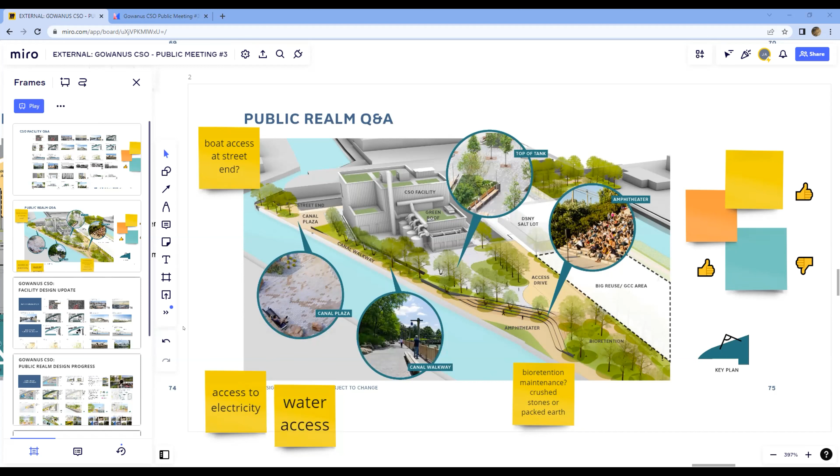Regarding the natural bulkhead, when we got to the north side, it was all just steel sheet piling. And I was hoping, because there's a natural edge there now, that there'd be some way to retain some of that, even if it was installed outside of the sheet piling. I don't know if there are any limits on reducing the width of the canal, because it's being reduced elsewhere. But even if you had 6 or 8 feet of some sort of natural habitat below that, that would allow some interest to passersby to look down, see ducks, other birds, anything else that might come along.

Awesome, that's all. Thank you so much, Glenn. I think we got all of that down. Diana, take it away.

Sorry to be the only other person talking. Yeah, just seconding what Glenn said about figuring out a way to have some habitat maybe on the outside of the bulkhead along the canal walkway. Maybe there could be some floating gardens. Figuring out how to do that would be amazing here, or attaching to the bulkhead, similar to some of the work that we're doing with the dredgers and the mussel habitat that we're trying to figure out.

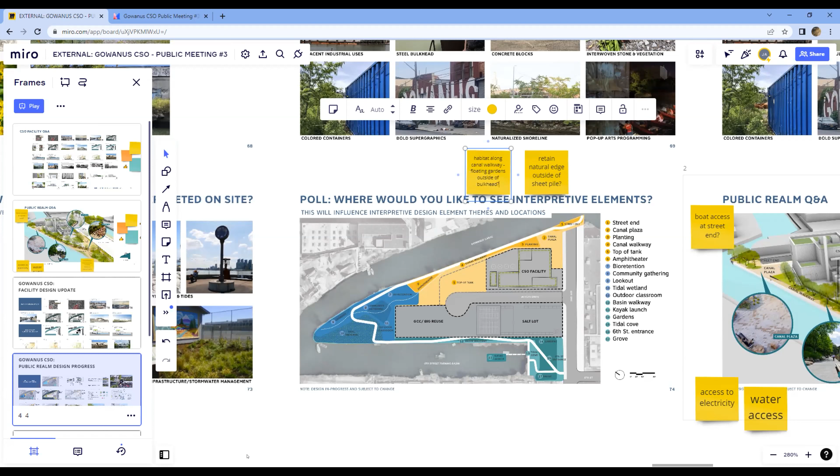And I also just wanted to ask about seating areas. I know the design team mentioned it would be difficult to meander along the canal walkway, but I'm wondering if it's possible to have little seating nooks, and I did think I saw some seating near the canal plaza, but just wanted to ask about that.

Oh, Alicia, you're on mute.

Rookie mistake. Thank you, Anna.

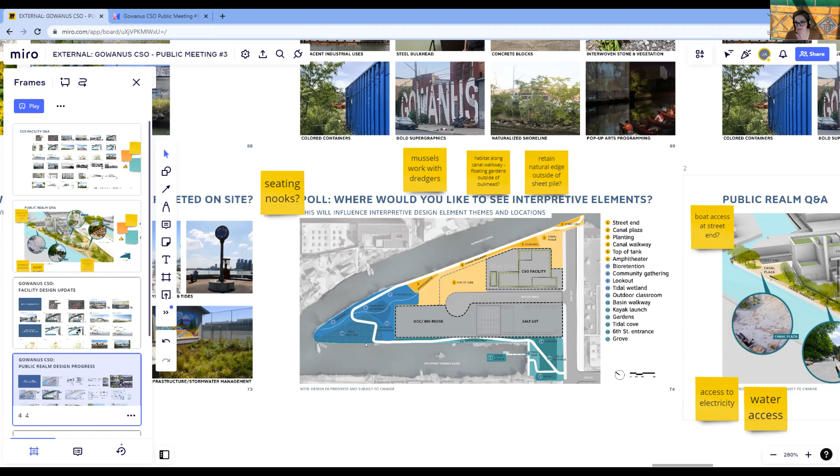Thank you, Diana. Yeah, seating is something I think is super important. Just being able to pause when you're walking through a space is so valuable for so many reasons, and it's something we're continuing to look at as the design progresses. In some of those rendering-type 3D sketches, we did have areas to sit down and rest, so you're not just on this long linear walk space. Yeah, there you can see it there. We're really looking to maximize opportunity for people to hang out.

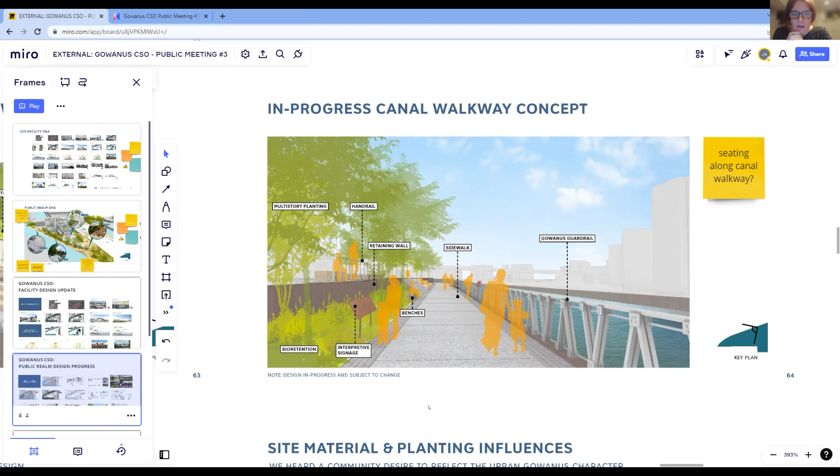Maybe I can also respond to some of the comments about the naturalized shoreline in general. I think we've really focused on trying to create more of a true naturalization of the shoreline, or as true as possible in the Gowanus, given our many constraints on the southern side of the point. So we haven't provided a lot of detail or updates to that area. If you came to the last meeting, that was identified—it's this area here, number 10, where we're trying to create a true tidal wetland pocket that is large and substantial. But that requires a lot of ongoing coordination with different agencies, including the EPA and our engineering team, so it's a longer development period. Similar constraints exist at the street end, and a lot of those conversations are underway, but we just don't have updates on those spaces today because of the agency and stakeholder coordination within those different zones.

As to the comments about whether it's possible to do something outside of the bulkhead, with the permitting restrictions of the bulkhead design and the EPA, and not wanting to fill in additional pieces of the canal, I think those kinds of techniques would probably need to be a second phase or future additive overlay. But I do know, Diana, we've talked on other projects, so that might be possible in the future on many sites. So around the canal, that opportunity exists elsewhere, and I don't see why that couldn't potentially be brought up and discussed here. But our real focus as a design team is, rather than small incremental pieces of natural infrastructure, to really have a substantial one at the point and focus on that as a big win for the wild and natural systems of the canal.

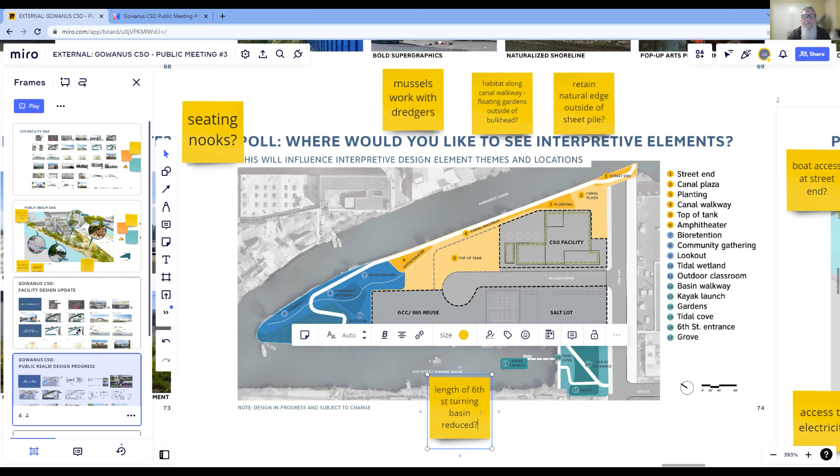Alicia, there was a question about the 6th Street turning basin—whether an earlier site map had it reduced to about half its current length. I don't recall seeing anything like that. There was actually an old barge sitting in the canal, so that might have conveyed that it had been reduced, but no, the intention is to maintain the existing 6th Street turning basin footprint as is, other than any reductions due to the construction of new bulkheads, which is very minimal.

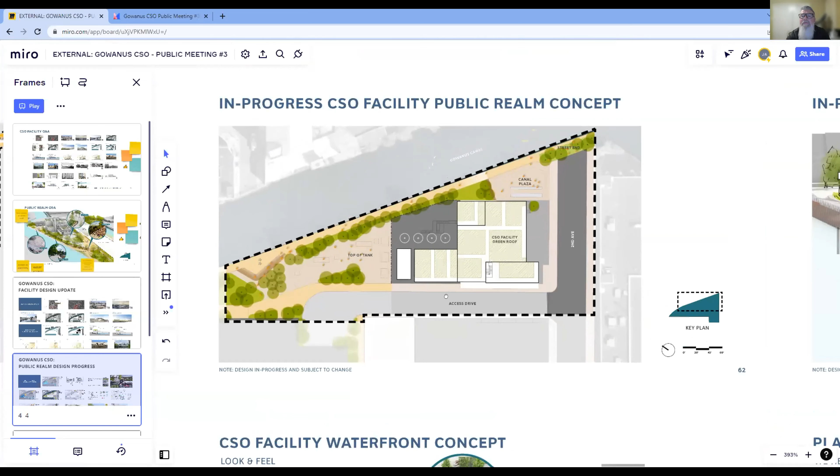Thanks, Kevin. Sorry, it's so hard to monitor the chat at the same time. Glenn's hand is up again. Glenn, take it away. Yes, I'm back.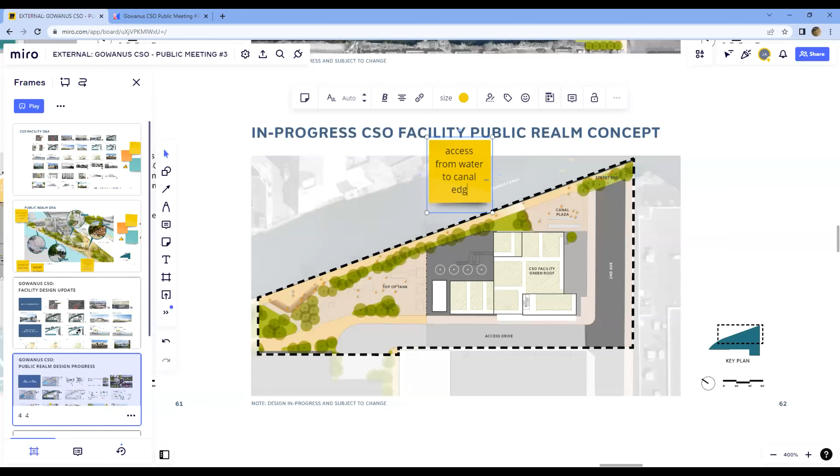Thank you, Rita, for suggesting having some way to extricate yourself from the canal should you find yourself falling in. Yeah, we've definitely heard this, and it wasn't brought up today but should be—that 2nd Avenue access point would be a perfect way to provide that, because it's visible from straight down the canal. So anybody who happened to fall in could see, oh, I can get out there. So that supports that idea, but anywhere a ladder can be put in, just in case, so that somebody isn't looking up and down the canal and seeing no way to get out.

Thanks to Donna, who reminded us that there's supposed to be some sort of public restroom facility here. Is this going to be part of the next presentation then? Yes, we're just not there yet, and we will get there—that's definitely among the feedback recorded, especially at the last meeting, requesting public restrooms. Donna, thank you for joining tonight, and to address the other part of your question, ADA accessibility is extremely important and is a priority as we approach the full design of this open space.

Diana writes, could interpretation elements bleed out onto the sidewalk and 2nd Avenue street end? Jessica, make sure you get that one. Certainly something we can consider—we'll go talk to our friends at DOT.

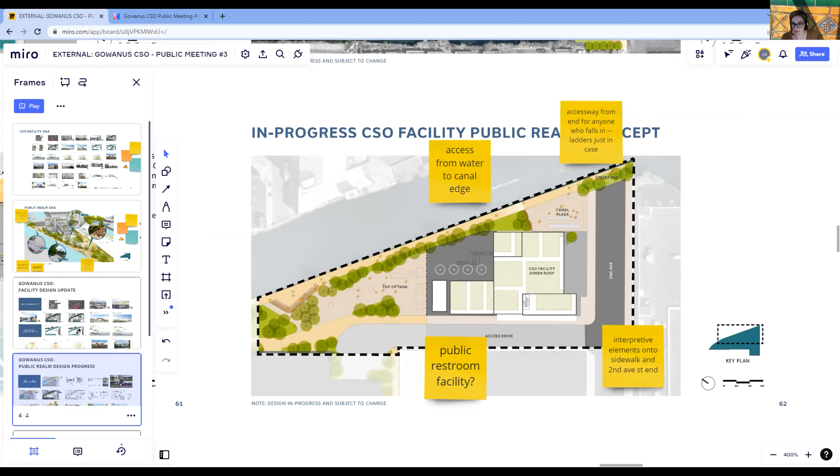Parking in the street might also need to be coordinated with them. Very funny, Diana. Noted.

Alicia, do we want to circle back to that one question we missed earlier about the water table? Oh yes, please take that, Kevin.

Sure. So the question was, how does the water table factor into the elevation and siting of the storage tank? It doesn't really factor into the siting—the site is the site. As far as the elevation is concerned, the most important thing, as we mentioned earlier, is protecting all of the electromechanical equipment from a potential flood. So the first floor, the operating floor, will be located above that elevation. The most important issue associated with the water table is just the design of the support of excavation, which will cut off the groundwater and allow us to construct the below-ground portions of the tank, and would allow us to perform the excavation. So that is factored into the support of excavation design.

And then for the tank design itself, there are two things that need to be considered when those concrete structures are designed. First is the buoyant uplift force—believe it or not, when the tank is empty, that groundwater is pushing the tank up, it's going to want to push the facility up. So you've got to take a look at that, balance the weight of the concrete, potentially add some tie-downs, and also consider the weight of the tank when it's full with water, to prevent some settling or differential settlement. So that's really the only impact here. I hope that answers your question, and if not, please let me know and we can follow up.